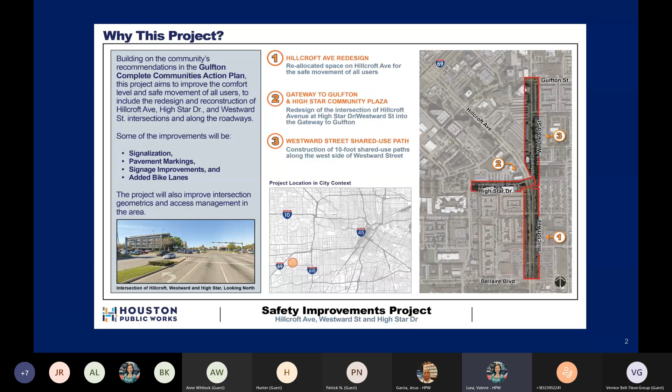We will be increasing the footage of the sidewalk from 4 to 6 foot, and in some places to 7 or 8. Other improvements include the intersections and new pedestrian traffic signals at Hillcroft and Dashwood to support safe crossings and transit access.

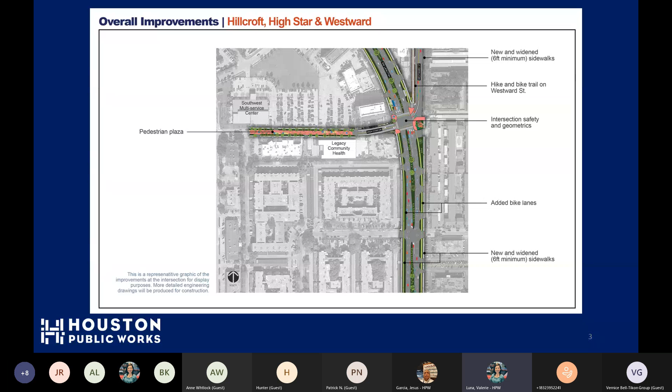Intersection improvements also included in this safety project are bicycle accommodations. We hope to one day see the extension of the bike lanes further north on Hillcroft and to grow the bicycle network for the Gulfton area. As depicted in this slide, you can see that we fully hope to have bike lanes further north, although they are not included in this project.

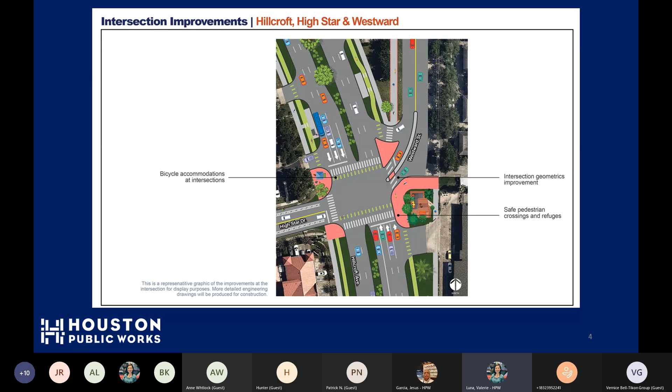Here's an overview of our major milestones. In 2018, the Complete Communities Action Plan was adopted. In 2019, Mayor Turner hosted a press conference in Gulfton to kick off the Safer Street Initiative. The Summer Safety Internship was also conducted in 2019, and community engagement was an essential part of their work study. Two public meetings hosted by Complete Communities, Houston Public Works, and Together for Safer Roads took place in June and July of 2019, led by our former director, Jeffrey Weatherford.

Houston Public Works held a public meeting in September of 2020, which helped us better understand the community safety concerns, and we thank everybody who participated in the survey after. We anticipate construction to begin in early February and anticipate completion late summer of 2021.

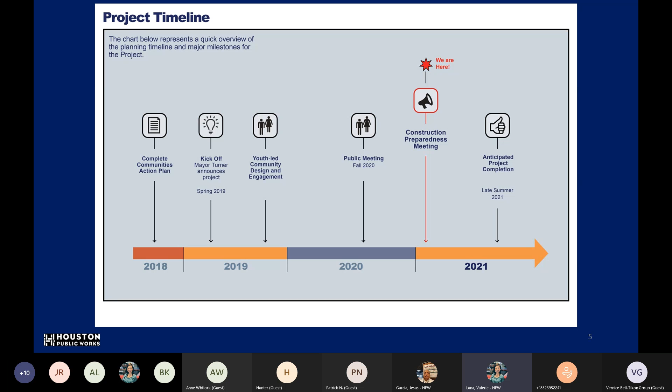Construction will have a total of 4 phases. First phase includes Hillcroft from Bellaire to Dashwood. Phase 2 will be from Dashwood to Clarewood Drive. We anticipate phase 1 and 2 to take an estimated 2 to 3 months, weather permitting. Please note that although phase 1 and 2 include the intersection of Hillcroft at Dashwood, the pedestrian signal is anticipated to be installed during phase 3 or 4.

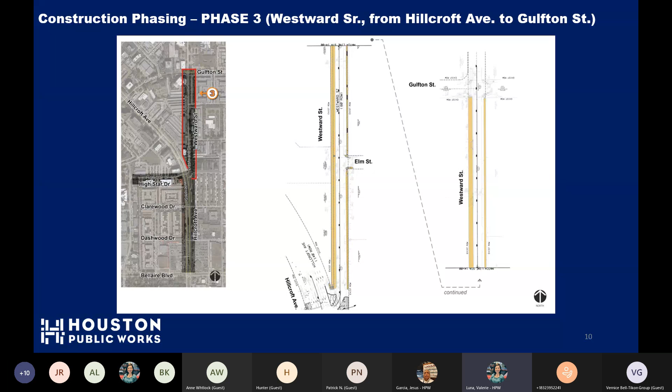Phase 3 includes Westward Street from Hillcroft Avenue to Gulfton Street. On the left, you will see our depiction of where phase 3 is, outlined in red. We will be constructing a 10-foot hike and bike trail along the west side of the street, a 9-foot buffer, and a 6-foot sidewalk on the east side of the street. On-street parking will not be affected by construction.

Phase 4 includes Hillcroft from Clarewood to High Star, Westward, and all of High Star. We will be installing an 8-foot buffer space and bike lanes. With the potential help of outside partners, the buffer space could one day include a wide range of uses like landscaping, pedestrian lighting, artwork, and be a space for gatherings and community engagement. Please expect to see machinery and materials staged in the planned buffer zone during this phase. We anticipate starting phase 4 in May of 2021.

Our contractor is responsible for implementing a traffic safety plan and will monitor the plan throughout the construction phase. Our Houston Public Works team and the contractor will continue to monitor the implementation of the plan and make any necessary changes to ensure the safety of all users throughout construction. We understand construction can be uncomfortable, so we want to be mindful of everyone's travel through the area during this construction phasing.

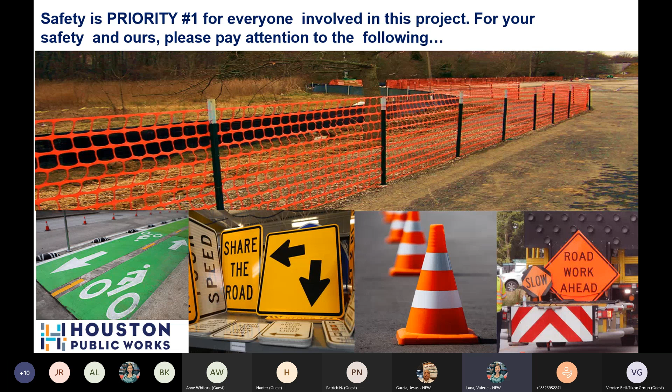When it is time for the contractor to start the work, we will be distributing door hangers with pertinent contact information in case you have any further questions or concerns. So please hang on to your door hangers throughout the project. But if by chance you do lose it, you can always submit questions by calling 311 or by visiting houstontx.gov/311. You can use the project number here in parentheses, starting with the letter N as in Nancy, to reference, and you can always email buildforward@houstontx.gov.

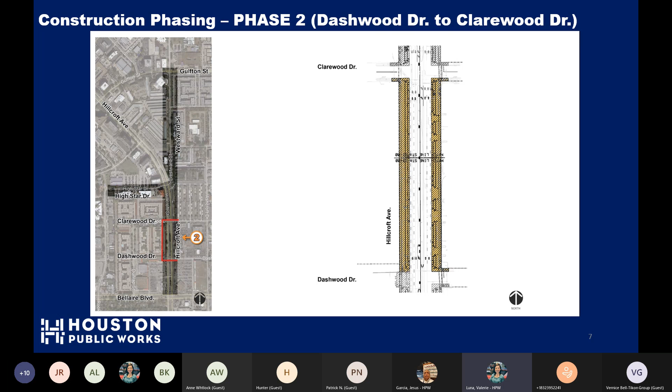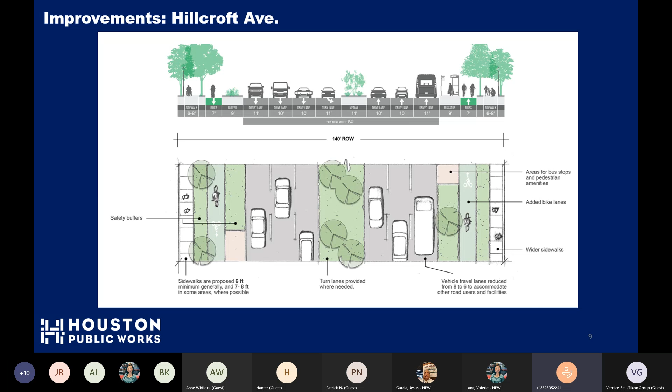Phase 3, westward from Hillcroft Avenue to Galston, which is where the hike and bike trail is going to be installed. And our phase 4, Hillcroft from Clarewood to High Star, westward and all of High Star. And you'll see here that Rukin is our boundary, but we won't be going any further than that.

I may have missed this, but is there a dedicated web page for this project if we're looking for more information, like a summary of sorts? There is, and it is located at the Planning Department website, I believe under their Vision Zero tab, and it will be updated with this information.

And in the past, they have kindly posted the recording of our meetings, which I will be asking them to do once again. So you'll be able to not only visit the YouTube channel, but you'll be able to visit the Houston Vision Zero website to also view the recording.